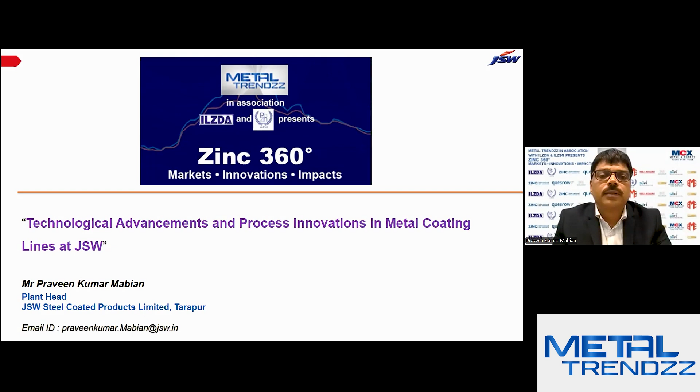Thank you, Vinaji, for this introduction. Good evening, everyone. My topic for today's webinar is technological advancements and process innovations in metal coating lines at JSW. We spoke a lot about the zinc consumption. The total consumption of zinc is 0.3 million ton, which is consumed by the coated steel plants, and JSW's contribution is close to 45%. This indicates that we are also contributing to the circular economy of the country.

Slide is changing? Yeah. So this is metal coating. Metal coating lines started in India long back, 4 decades back, in 1985, with a Dagal furnace. And quickly after 5 years, the non-ox furnace or DFF furnace was commissioned, which added to the efficiency of the galvanizing process. And after 15 years, an automotive line was commissioned. That's a dual pot line of GI and GA. GA was basically for the automotive application.

Then galvalume was introduced in 2007 with the dual pot lines, and magnesium coated product was introduced around 3 years back. And going ahead, maybe in a couple of years, we'll have a combo line by some of our steel manufacturers, which is a CAL and CGL combination, and which will also have aluminized steel. So this is a snapshot of the continuous metal coating lines in India.

If I talk about the products, initially it was all about full hard for the roofing sector, and then we switched over to commercial soft quality, then drawing quality, which is required for the automotive and appliance applications, then high strength. The challenge was to reduce the weight of the steel, so we changed over to high strength steel. Now we are talking about ultra high strength steel. Among the various products, the major share is GI, the galvanized part, then galvanneal, then galvalume, and then magnesium coated products.

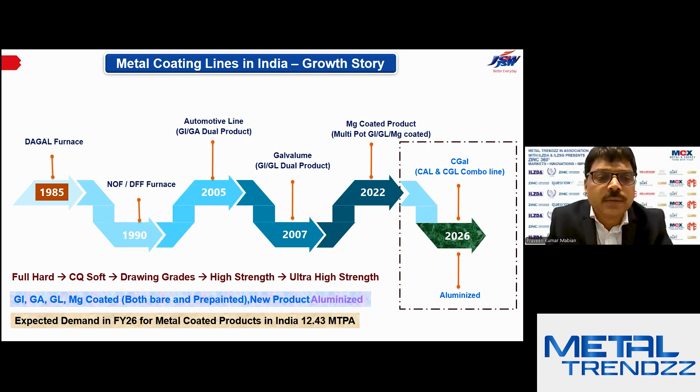Expected demand: Sachin also spoke a lot about demand for coated products in India. We are expecting around 12.43 million ton of metal coated products demand for this financial year. Since JSW has got 45% of market share for metal coating, it's very important to know our milestones. We started the first CGL, continuous galvanizing line, way back in 1989. That was a very slow speed line, only 30 mpm, but after a few years it was converted to 150 mpm line speed.

Then we came up with the first non-ox line at Vasind. That was the first CGL with a non-ox furnace, a direct fired furnace. In 2010, we acquired Kalmeshwar. After that, in 2013, we installed the automotive line at Vijayanagar. Then we acquired the ACCIL plants of Khopoli and Bawal. And recently, around 2 years back, we acquired a national plant at Dhar, and also acquired Bhushan Power and Steel, starting with one line way back in 1989.

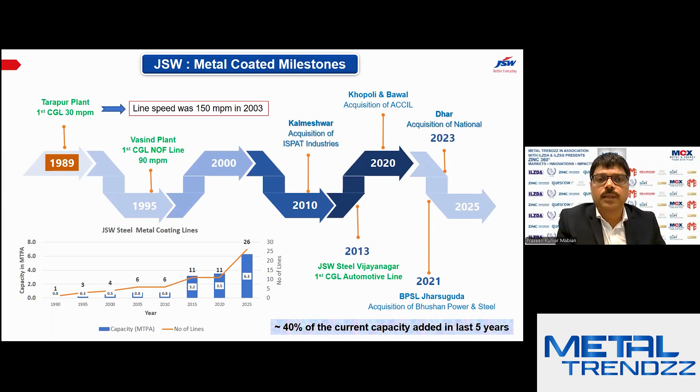Right now we have 26 metal coating lines across 8 different locations. The very interesting part is 40% of the current capacity was added in the last 5 years. As of now, we have 6.3 million ton of metal coated capacity. Here is the growth story product-wise. In 1989 the first galvanized product was launched. In 2007 we introduced Galvalume, then Galvanneal in 2014, and tin plate, mainly for food packaging, in 2018. Then magnesium coated product was introduced mainly for the solar segment in 2022.

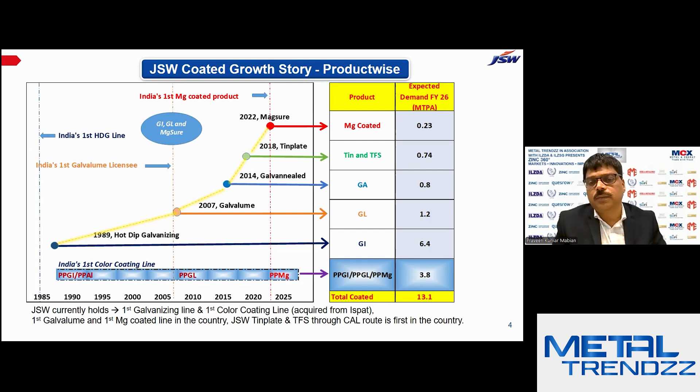In total, expected demand, as I told, is 13.1 million ton. The major share is GI, which is 6.4 million ton of demand for coated. Segment-wise, there are various segments. You can see this milestone in 1985: we started only with general engineering products, which contribute around 24% of the total coated demand. In 2005, we started with PEB and infrastructure, contributing close to 50%; 47% is the contribution of PEB and infra.

In 2014, JSW started the solar segment. Earlier, solar structures were imported and mostly Galfan was used. We introduced galvanized product for solar power plants. Sachin spoke a lot about solar demand, which is going to increase in a couple of years. We contribute around 70% of the solar structure demand in India, and we see a growth rate of 14%. Consumer durables we started in 2017-2018, then the automotive segment, then we entered food packaging in 2018.

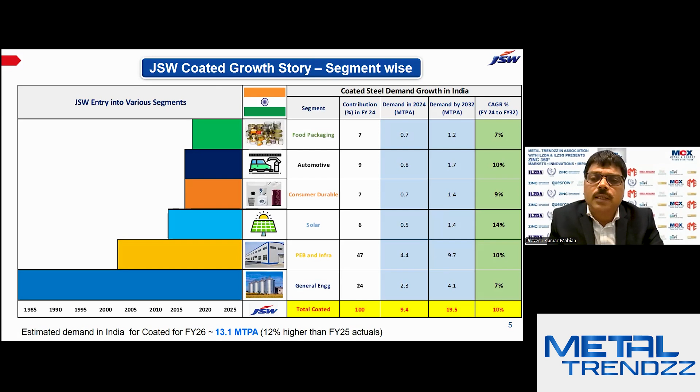If you see the total coated steel demand, the demand in 2024 was 9.4 million ton in India, and it is going to grow by almost 10 million ton more, to 19.5 million ton. We see an overall CAGR of 10%. The maximum growth is going to come from solar, then PEBs, and food packaging, general engineering and consumer durables will be between 7 to 9%.

So what exactly did we do in order to have this growth? There were so many product and technology innovations and evolutions done in the process. Starting from 30 mpm speed, we now have a metal coating line operating at 220 meters per minute, which is the fastest in India. So we have done a lot of innovations. We have done investments on the technology part.

And you can see the welder, the conventional welder. I'll show you a couple of photos later. The conventional welder takes a welding time of more than 1 minute. Right now, the welding cycle is close to 30 seconds. So if anything is less than 60 seconds, you will be able to ramp up the speed of the metal coating lines. We have also done investment on the furnace part in order to get fuel efficiency.

Long back, around 3-4 decades back, only metal pots were used. Right now, metal coating lines use ceramic pots with channel type inductors for better life. This increases the utilization of the overall metal coating line. We have furnaces operating at 100 tons per hour. Initially, it was only 5 tons per hour. Right now, it is 100 tons per hour.

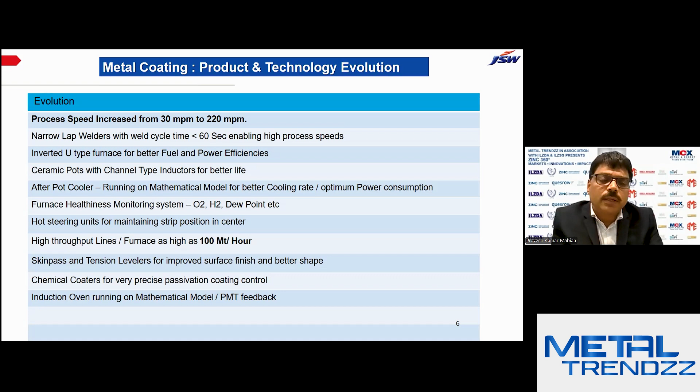We are able to introduce skin pass and tension leveler in our process to improve the surface finish and get better shape. And we have done a lot of innovations in terms of mathematical models to control the process parameters. If I summarize technology, automation, and sustainability, technology plays a vital role: going for very high speed metal coating lines with very high tons per hour production rate and quick product changeover. This gives us flexibility,

mostly in dual product lines; how fast you change over from one product to another plays a vital role. If you are able to do that within a short period of time, you can increase the overall utilization of the process. In terms of process, we have a wide range of products with very high coating mass. We spoke a lot about solar. For solar, generally very high coating GI 600 GSM galvanized steel is used, which was developed by JSW Steel. And we talk about high strength and ultra high strength steel for automotive.

In terms of automation, we have many AI and machine learning predictive maintenance models in the process. We have process simulations, and we have sensors for the equipment. We are using robots for drossing as well as for handling of sleeves. Also very important are the closed loop coating control system and the electromagnetic strip stabilizer control system.

In terms of sustainability, we have an equal focus. Renewable power is one major area; as of now, the power used by the coated plants comes from thermal power, so we are migrating to renewable power, wind and solar. A closed loop fume exhaust system gives us better control on emissions. High efficiency heat recovery systems give us reduced fuel consumption and power consumption.

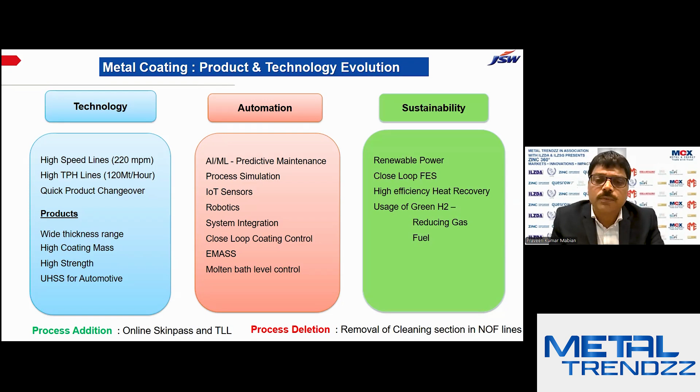So just a few photographs: the earlier conventional overlap welders were replaced with the narrow lap welder with a much reduced weld cycle time. This gives us reduced scrap generation because we can always pass these welds through the skin pass, tension levelers, as well as the coater. 30% of JSW metal coating lines have a narrow lap welder. This has improved utilization of the metal coating lines by 2%.

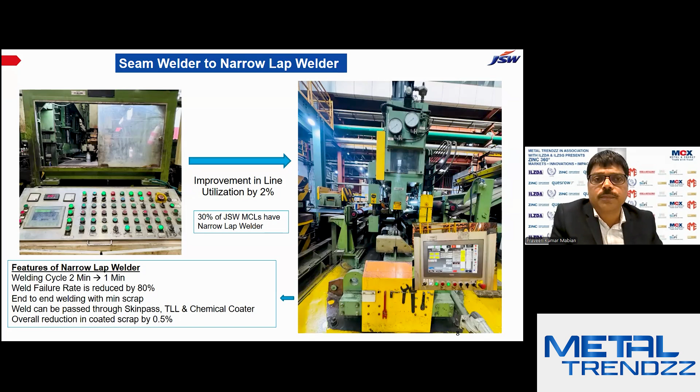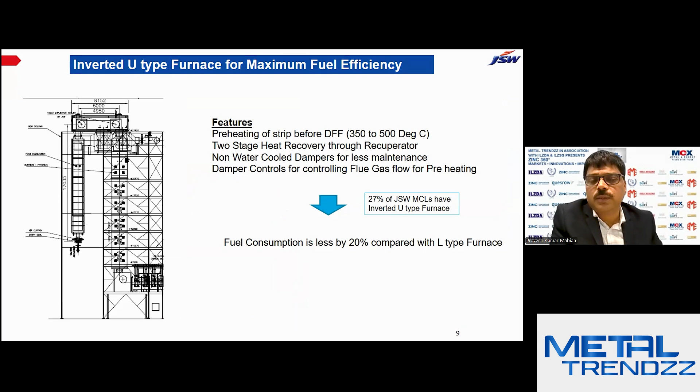This is not a new thing. The inverted U-type furnace increases the fuel efficiency of the furnace. 27% of the JSW metal coating lines have an inverted U-type furnace. Fuel consumption is around 20% less compared to the conventional horizontal furnace or L-type furnace.

Conventionally, hydrogen was generated through ammonia crackers using raw ammonia, which is very toxic in nature. The idea was to generate hydrogen either as gray hydrogen, blue hydrogen, or green hydrogen. These are the three different processes. We have started using gray hydrogen, which is nothing but generation of hydrogen using natural gas. Here the purity is better than the conventional hydrogen generation method, and the cost is also 50% compared to the ammonia cracking process.

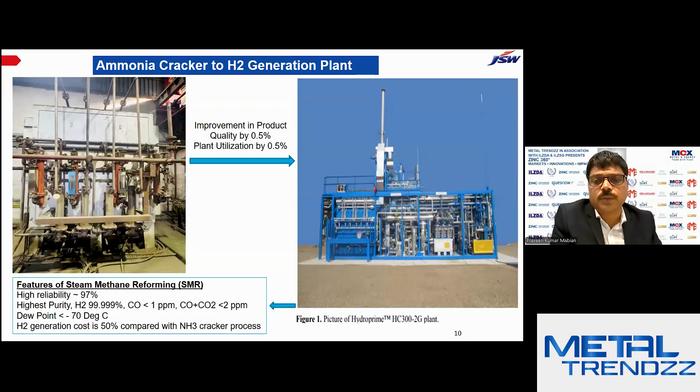This is about the metal pots, the zinc pots, which were used in the metal coating lines. Initially, you can see all in red, which are steel pots, MS pots. We call them Armco steel pots. Later, you can see the blue ones, which are stainless steel pots. JSW was the first company in India to start with the stainless steel pot, SS316L pot. Right now, almost all of them are ceramic pots. Out of 49, we have 45 ceramic pots, 2 metal MS pots, and 2 stainless steel pots.

As an innovation, we have some best practices for inductor condition monitoring. We monitor the conductance ratio. We monitor the bushing temperatures. We have standard SOPs generated by the team to enhance the life of inductors.

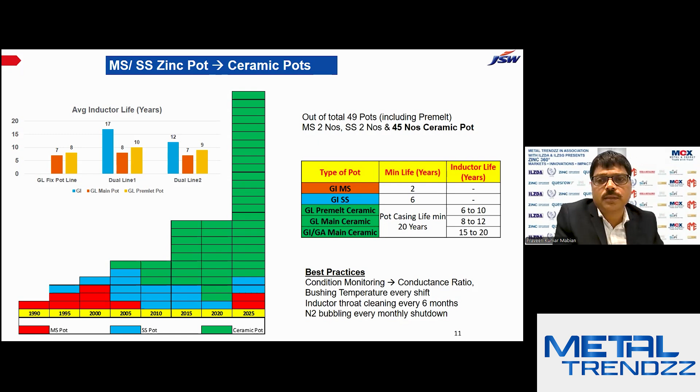And metal pot casing, metal pot life, you can see it's written here, it's only 2 years. GI MS pot is only 2 years. SS pot's life is not more than 6 years. But we are talking about more than 20 years of life for pot casing, for the ceramic pots.

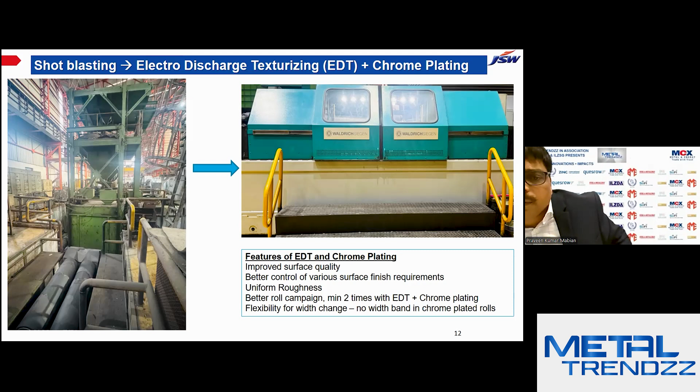Shot blasting was an old process where the skin pass rolls were shot blasted. And the next technology is the EDT, which is our electrodischarge texturizing, along with the chrome plating, gives enhanced roll life as well as improved surface finish, better control of various surface finish requirements, and this gives a flexibility for a width change.

So here you can see the high-speed metal coating lines, how they evolved from 1990 to 2025. You can see the maximum speed of the metal coating lines as well as average speed. So the major basic requirements for running any metal coating line at high speed: key is automation, then strip stabilizing, because at high speed you have a lot of challenges controlling the zinc coating. So you must have a very stabilized strip coming out of the zinc pot. So eMASS, the electromagnetic strip stabilizer, is helping in that category. Then you have much better tracking of weld through skin pass, leveler and all.

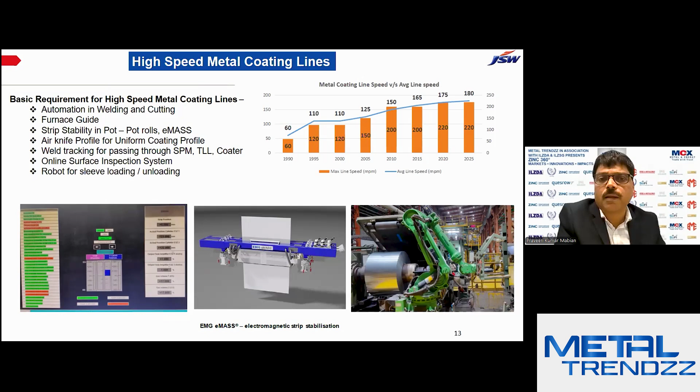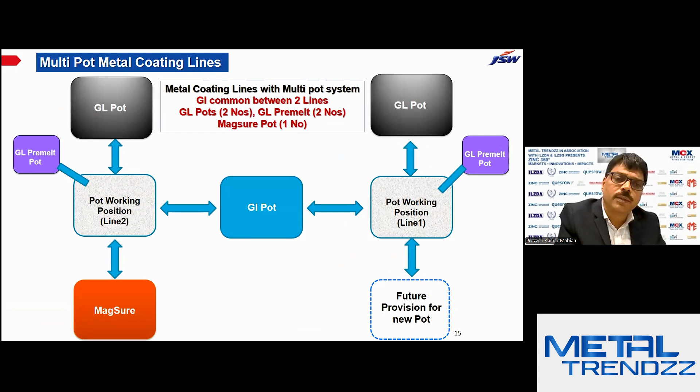So these multi-pot metal coating lines are two different lines having some common pot and individual pots. So here you can see line number 2 has got 3 pots, and line number 1 has got 2 pots, and in totality 1 common pot as well between the 2 lines. So this always gives us flexibility depending on the market requirement, depending on the demand of the product. You can always change over from one product to another product. So these are some digital technologies we have in manufacturing for coated. I won't go in detail.

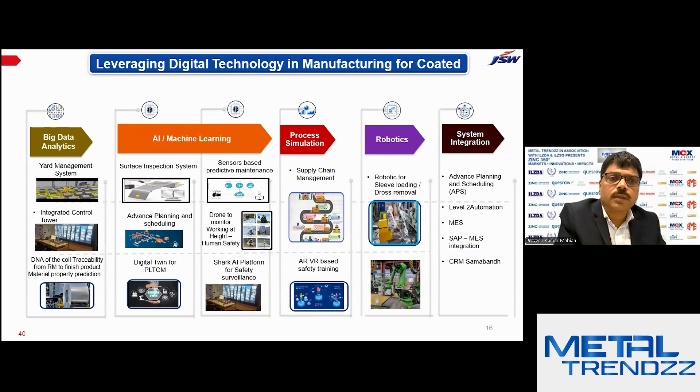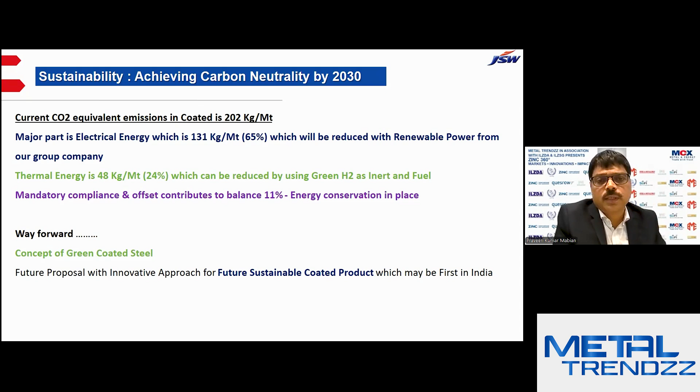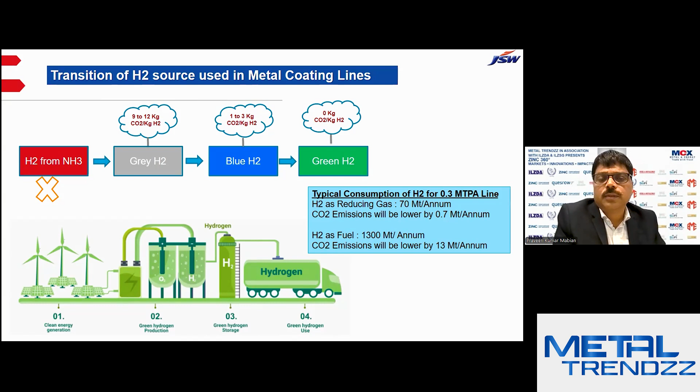And as far as thermal is concerned, I'll go to the next slide where I'll explain what is happening in this field. Okay, so there are different ways of generating hydrogen here. You can see the hydrogen from ammonia is almost nil now. The gray hydrogen is generated with natural gas, blue is with CO2 storage. Then we have green hydrogen, where the emissions are almost zero. Typically for a 0.3 million ton metal coating line, you need hydrogen as a reducing gas at around 70 ton per annum, and as a fuel, 1300 ton per annum. For reducing gas, we can directly migrate from gray hydrogen to green hydrogen, so there will be a reduction in emissions.

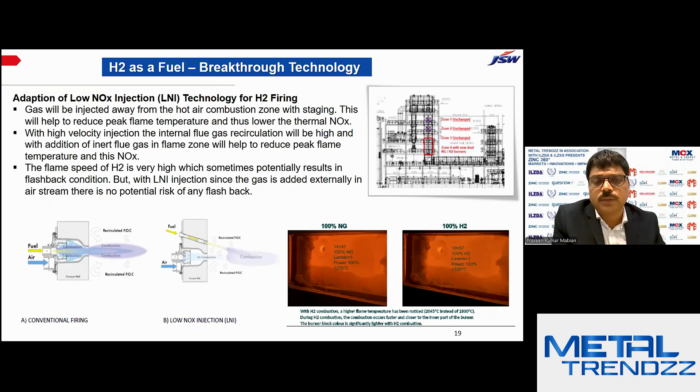So this is really the breakthrough technology, because we are going to plan hydrogen burners in the metal coating line. It's something new, because you might have heard of integrated steel plants where in DRI and all hydrogen is used. But for metal coating lines, usage of a hydrogen burner is a new concept, and it's going to happen in JSW Steel, maybe by end of this year. This hydrogen burner is suitable for both fuels, either 100% hydrogen or 0% hydrogen, or you can always use natural gas.

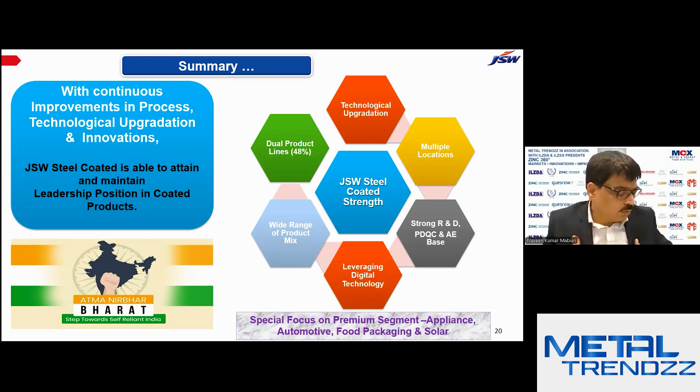So with continuous improvements in process, technological upgradations and innovations, JSW is able to attain and maintain a leadership position in coated. The levers you can see at the right: technology, digital technology. We have a product mix, dual product lines, multiple locations. We have a very strong R&D, PDQC and AE base. We always have a special focus on premium segments like appliance, automotive, food packaging and solar. And we believe in the Make in India concept, and we always encourage local suppliers from India for raw material sourcing.